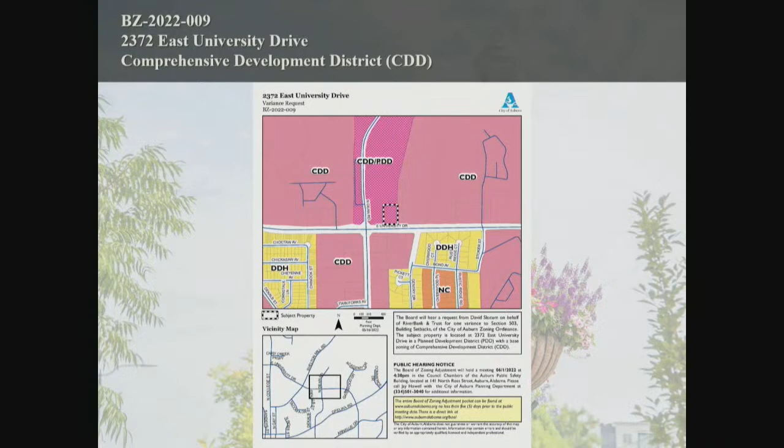Here's an aerial image showing the site pre-construction with a shared access driveway between the RiverBank & Trust and the subject property.

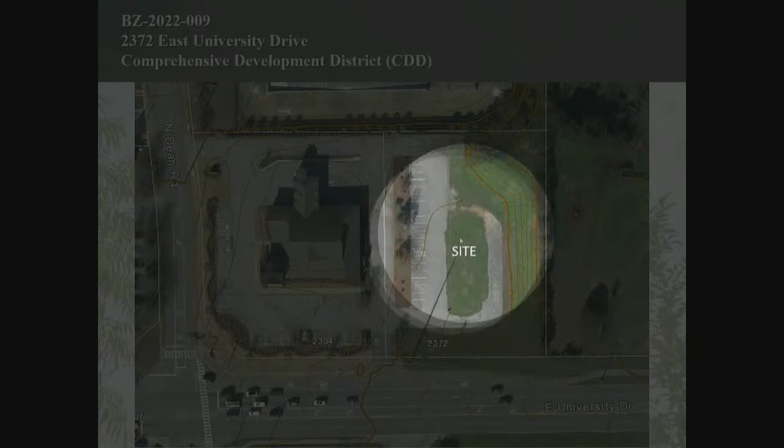The site plan for the project was reviewed by staff and originally represented a conforming setback. After several revisions, the building footprint was moved to the east slightly, and that resulted in the setback being non-conforming. Additionally, architectural plans had not been reviewed at the time, and that added 6 feet to the required setback.

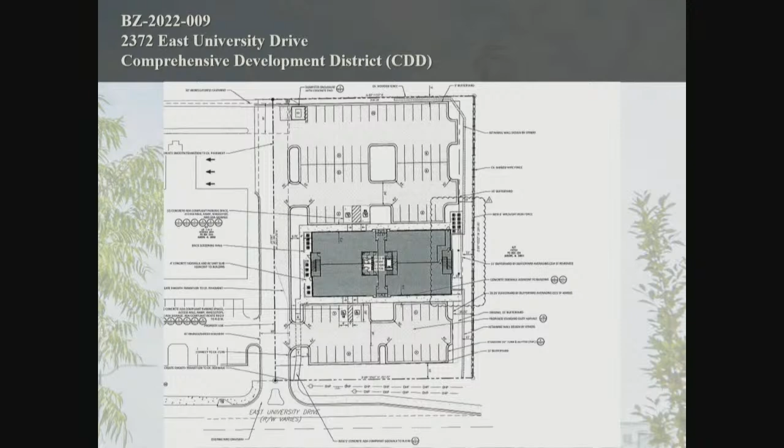Some permits to start initial site construction were issued while the final building permit was being reviewed, so there was some vertical construction. Staff reviewed the project for the final building permit, and that's when it was noticed that the setback was too close, with the patio area being approximately 12 feet from the property line and the overall building height being 21 feet to the property line.

So here's the current situation out at the site. The upper portion of the building is essentially framed in already. There's a large retaining wall that was required to accommodate the building footprint.

Here is a view from the neighboring property looking towards the building. And here's that aerial again, showing some of the topo challenges that the site faced, and why they had to build the retaining wall, which essentially dropped the building 13 feet below grade, to have the grade flush with the shared driveway.

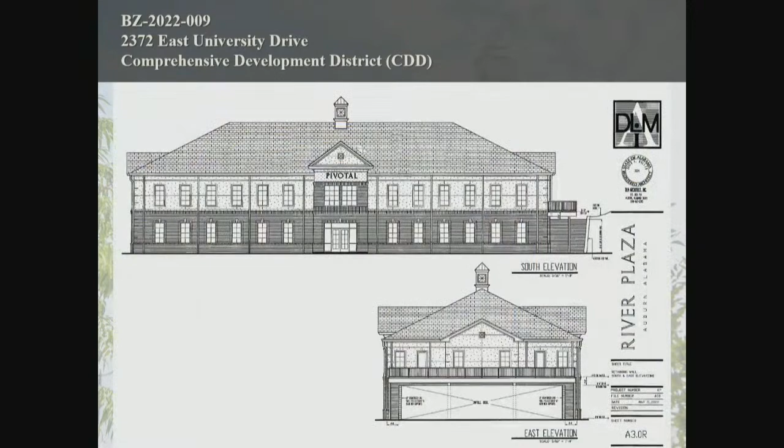So the grade difference between the two does meet the intent of the angle of light setback, in that the building dropped down 13 feet, so that angle of light is being maintained in a sense that it's not creating a nuisance, not creating a fire hazard issue. So if the variance were granted, there's no issue to the general welfare or to fire safety.

But there are no hardships associated with the request. They originally had a site plan that was conforming. There are things they could do to make the site conforming, although it may have some economic challenges to it. But economic difficulties are not grounds for granting a variance.

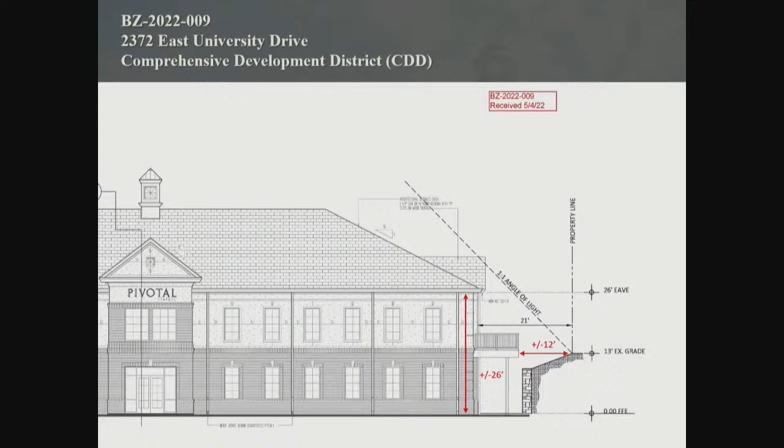We did receive a letter from the adjacent property owner that has no objections to the granting of the variance. Based on the criteria in A through G referenced in your staff report, because not all of the criteria were met, staff recommends denial. The applicant's representative is here, and I'm happy to answer any questions.

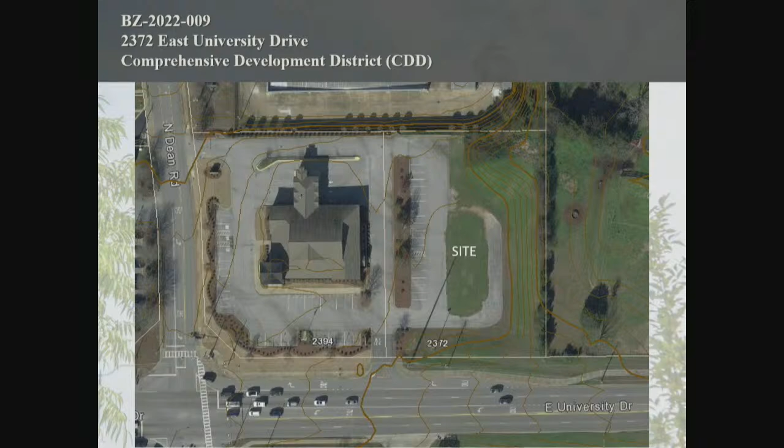Thank you. Yes, sir. If the applicant would like to come forward and speak, if you'll sign in right there to the left on your clipboard, on that clipboard.

Trying to figure this out here. If you press the top one, it'll zoom. Yeah, there you go. Okay, pressing on.

Good afternoon, David Slocum. I'm the civil engineer of record for this project.

I wanted to begin by giving you a brief overview of what this project is. This is an 18,600 square foot Class A office space building. I don't know if any of you have looked for office space in Auburn recently, but it's difficult to find Class A office space. I've looked myself.

We're really looking forward to this project coming online. It will have 16,000 square feet of leasable space, and 85% of that space is already leased to businesses such as commercial real estate, CPAs, financial advisors, things like that. So it'll be a professional office building.

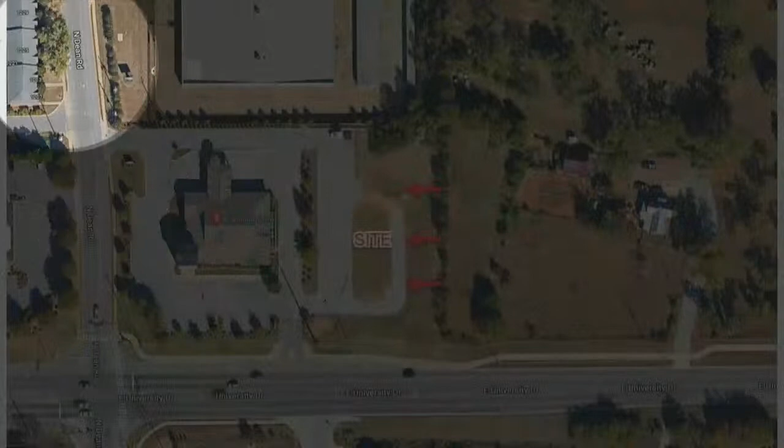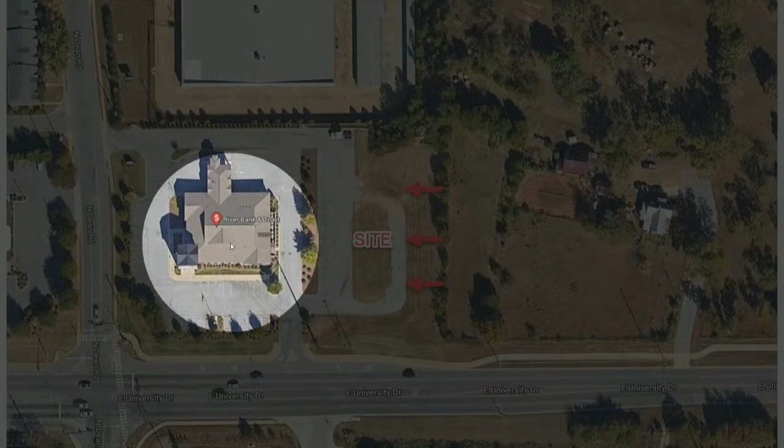As Logan showed you, this is the site. You can see North Dean here. This is Riverbank and Trust. And then this is where, when Riverbank was being constructed, this was the temporary bank location. I don't know if any of you remember, but there was a significant slope between this tree line and this asphalt here of about 13 feet.

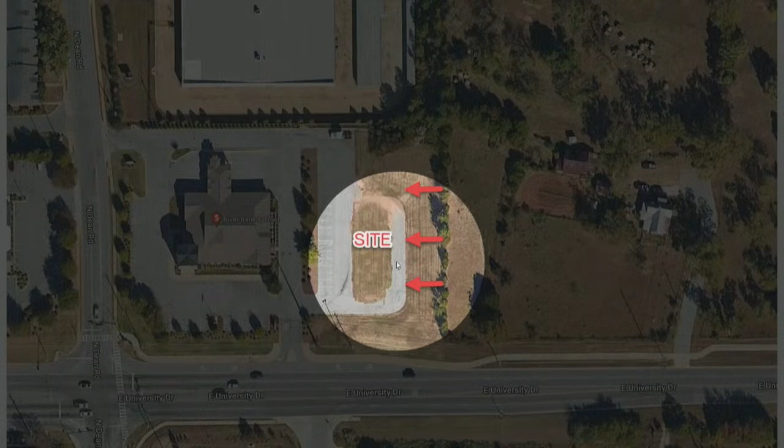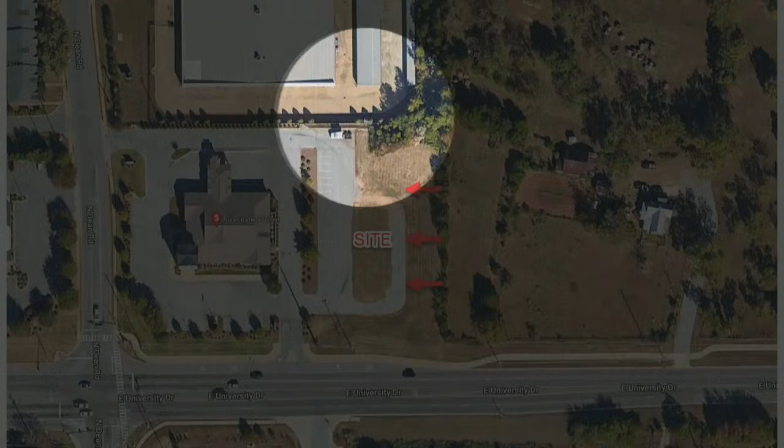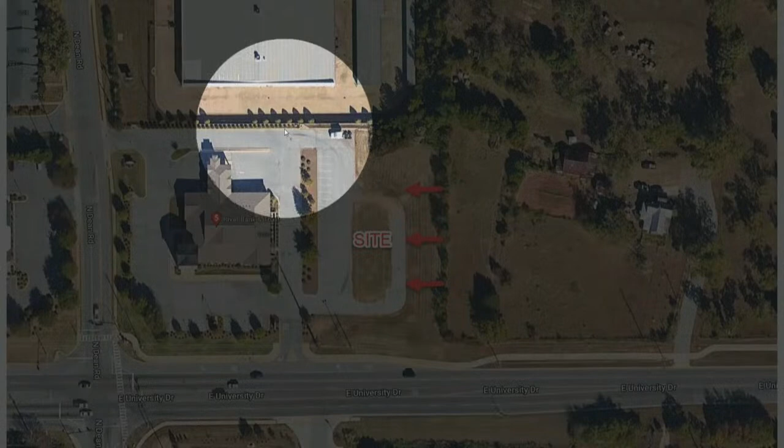If you'll also notice this very thick shadow here, that is a retaining wall between the River Bank site and the climate controlled storage units. I haven't been back there lately, but that's probably about 15 feet of fall between those two sites. So there's significant grade changes and topography challenges with this site.

This is the open field that you've probably ridden by and seen the big longhorn cattle out there. That's the property owner that wrote the letter saying that he has no objection.

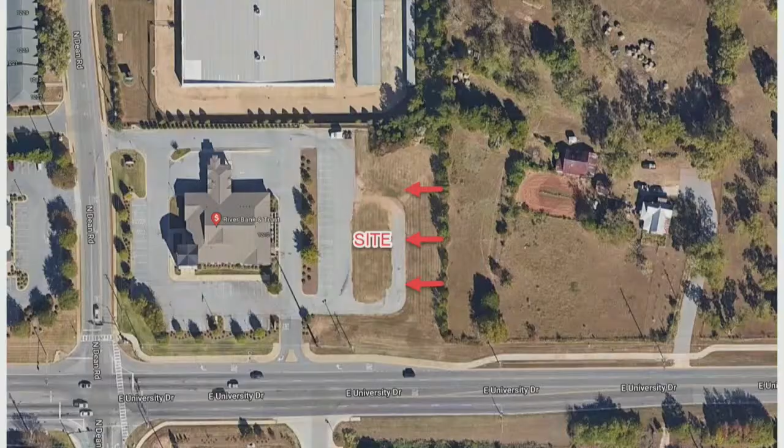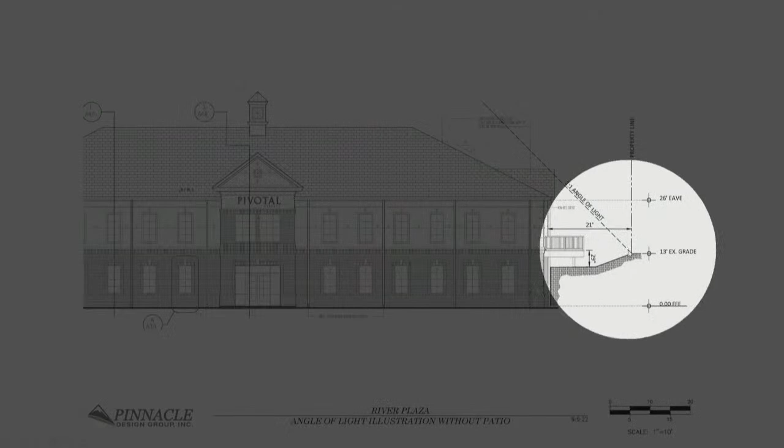As we've mentioned, this variance is all about the angle of light setback. I'm sure you're all very familiar with how that works. The eave height from the front of the building is 26 feet. If you look at the eave height from the property line in question, it's only 13 feet. So had the building been constructed the way it's shown here, there would be no variance needed.

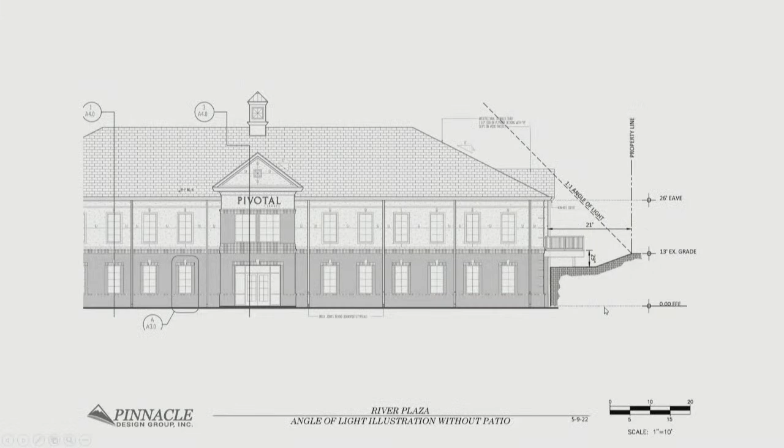However, we chose to excavate this small area here and build a retaining wall, which is shown here. The reason for that, there are several reasons, is to allow air conditioner units to be placed in that space so they're not visible from East University in the parking lot. I'll show you the floor plan in a moment.

There are two doors that provide emergency egress out of the building on that end. There are windows on that building that also serve not only as daylight for the tenants, but for emergency fire egress also. Not to mention the fact that building the retaining wall allows full use of the property rather than having a completely different layout.

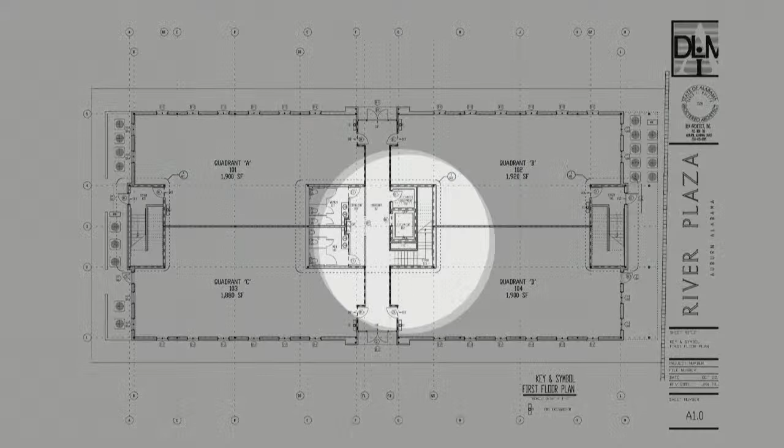So this is the floor plan. You can see the air conditioner units here. This is the retaining wall. This is the open space. You can see the exit there and windows along this side of the building.

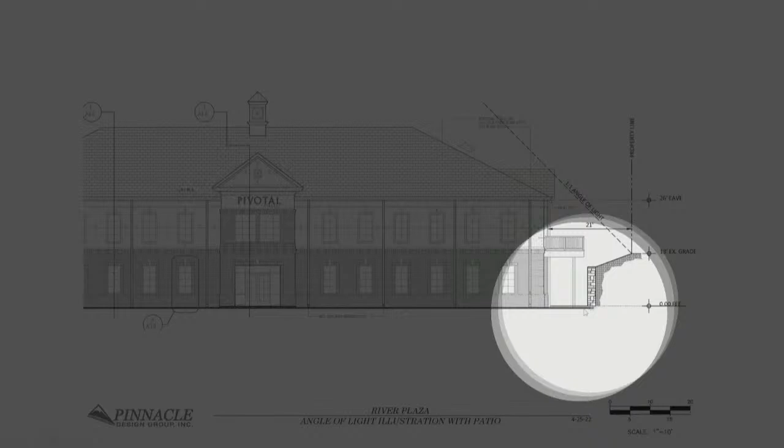So the entire reason for the variance is this one excavated area. I'm hoping that makes sense, because the planning department now has to measure the eave height from this point rather than this point.

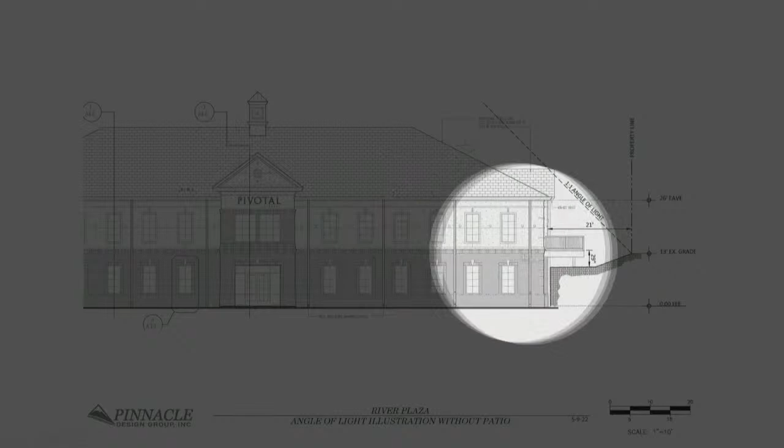So this is, I think, the same photo that Logan had showing the retaining wall. You can see the adjacent grade is pretty much level with that second floor. So if you view the building... did we lose that last photo?

From the adjacent property, it appears to be a one-story building because of that drastic grade change. So that's why we believe the intent of the zoning ordinance is still met. It all just boils down to a technicality of where you measure the angle of light. If you draw the one-to-one line from that point, it clears the eave height.

We believe the variance is necessary to allow full use of the property, to allow adequate emergency egress, to allow space for utilities to be concealed. The entire variance is caused by this unique property topography scenario. As mentioned, granting of the variance doesn't negatively affect the adjacent property owner or the general public. So we hope you'll consider making a positive vote. I appreciate your attention.

Is that staircase the emergency egress there, or is that just a patio you're hanging out on? Yes, it is emergency egress. That's what I thought, an exit. I just didn't see any stairs. I assume those are coming later. Second floor and first floor.

So the door on the first floor is an emergency egress, or the patio is an emergency egress as well? Can you put that slide up that shows where the cutaway was, where the wall is? Is this the one? The one from the side, or the actual picture, I think, is what we want to see. Either one, yeah. No, go back, the one that's in section. Scroll backwards. That right there. Or did you want to see a different one? No, that's good enough.

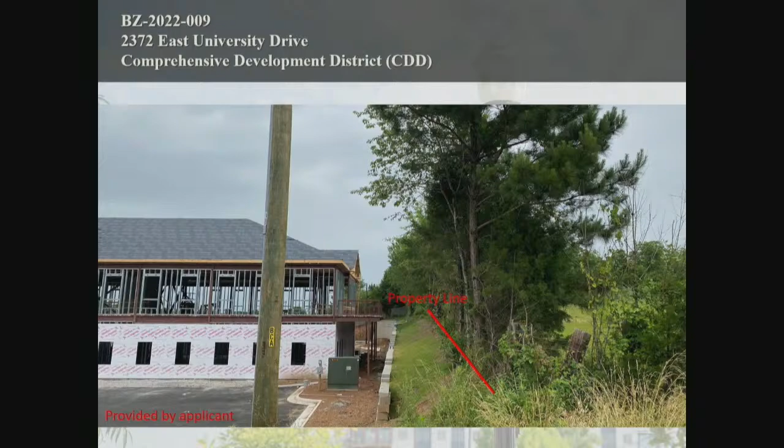So that deck, that second floor deck, is that access out of the building as well? Yes, but that wouldn't be considered emergency access because there's a dead end there. There's a staircase immediately to the left that would bring you down to the end of the building where you could exit and go either direction. So it's internal, and there's doors and windows below the deck for exit? Exactly, yes.

So is that emergency exit required to meet the code for emergency exits? Yes, it's my understanding, I'm not an architect, but yes, that is required. So was it approved before you made this change though? The building plans were not reviewed until we got to this point. Is that what you're asking? Yeah, and when they were reviewed, that's when this issue became apparent. And you mean reviewed by the city? Exactly, yes.

And if you dug down, just to understand the angle of light, if you dug down another floor and didn't build a retaining wall, then you'd have to be 10 feet further away? The height measurement's taken at the base of the building, basically the grade. So you measure the height from the grade at the building to the eave, and that dictates the setback. So the fact that they put that retaining wall in there and lowered it made this become a variance issue? Yeah, if that was sort of a basement on that end of the building and the grade was like the other drawing he showed, up below that deck that extends out, then it would be measured from that point and it would comply.

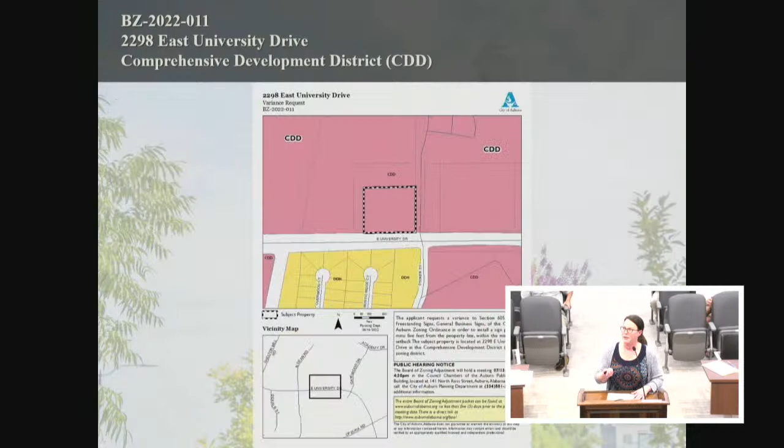This is a request for a variance to Article 6, signs, of the zoning ordinance. The applicant is asking for a variance to allow a sign to encroach into the 10-foot setback at the front property line. Here's the proximity map. The property is zoned CDD with some DDH across the street, Stoker Heights I believe, and the East Alabama medical facilities across the street as well.

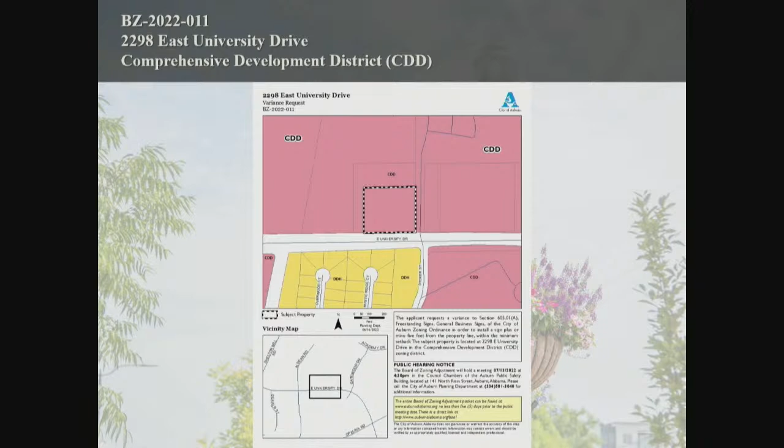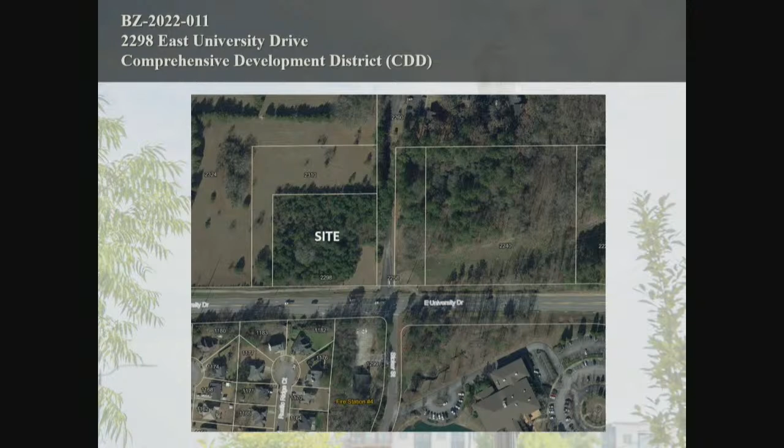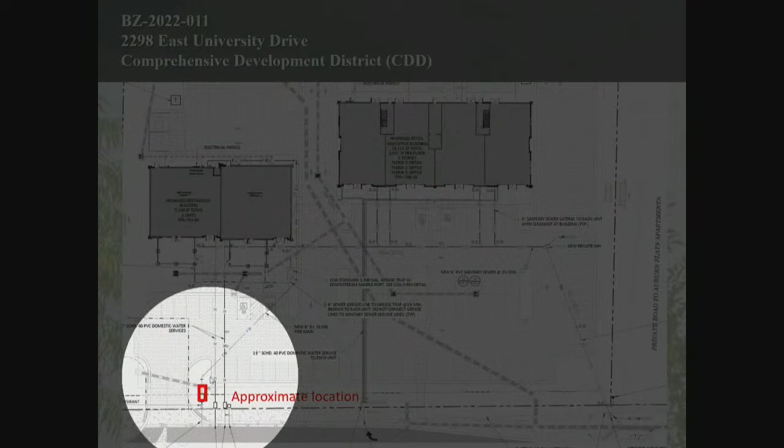Here is an aerial of the site. The building is under construction now, two buildings under construction, one 2-story and one 3-story. They are building a restaurant, retail, and office space development. The applicant is wishing to place the sign 5 feet from the property line, when 10 feet is required. The sign would be 120 square feet with spaces for individual tenants to have their signage.

After staff's review of the variance request against the criteria for granting a variance, we found that the request does not meet the criteria, and we recommend denial. The applicant is present.

Amber, I saw that you noted there might actually be a visibility issue on this one, right? There was a letter from the neighbor, Shirley Patton, on number F. Staff is concerned that the proposed sign location may create a site visibility obstruction for motorists, and the neighbor said the same thing as well. Yeah, that's what you're thinking, Morgan. Good find. I starred that one.

Anyone have any more questions for staff? Thank you. Is the applicant here? If they'd like to come and sign in and speak, please.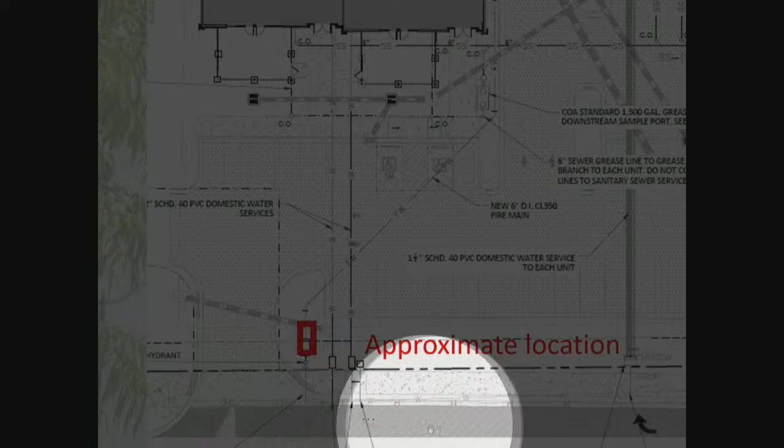Can you zoom in on that area? Okay, I don't know if you can see it or not, but it's barely visible. You see that darker gray stripe, and there's the stop sign. That is the stop bar where a car would stop to pull out onto East University. The sign is way back behind that point. I can tell you right now, it would be very easy to show that that does not obstruct a view. So I'm not sure why that comment was made. If you're looking this way and this way, that sign is nowhere close to obstructing your view.

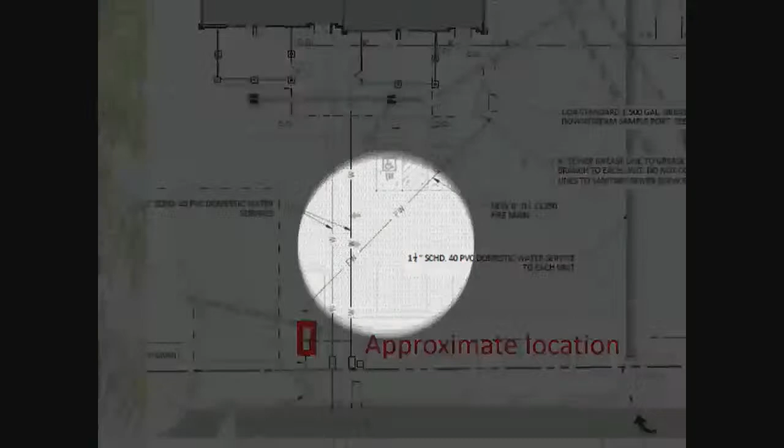So the issue here, what's the dimension from that gray stripe to that sign? I don't know if that's 5 feet. 25, maybe more than that. So the sign proposed there is 5 feet from the property line, and you're saying that's 20 feet of right of way before you get to where you stop? Are you asking for a straight line distance this way? Sure, I'm just going off the fact that I know this is 24 feet, so I think 25 would be accurate.

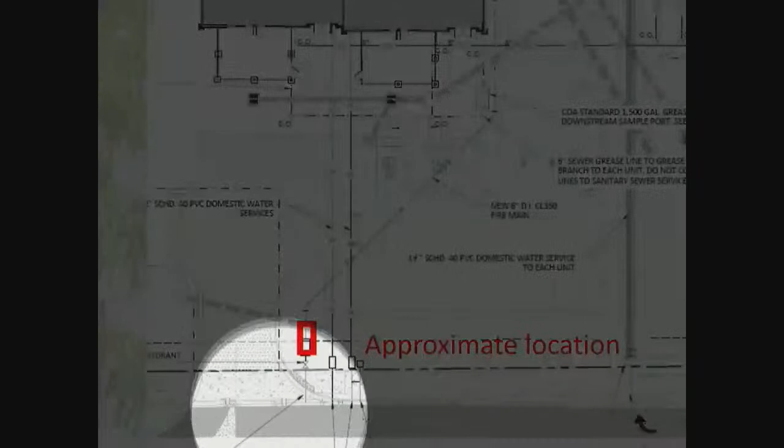So when a car exits out of there, can you put your pointer on where the car stops, because it looks like it can go left or right. This is a right out only, so whereabouts would a car stop? Right there, there's the stop sign, there's the stop bar. So when a car is coming out and a car is coming in, does that sign get in the way? If you back up a little bit, straight across from the red box, that little rectangle where your hand is, from left to right, is that kind of a blind spot area if someone's coming in and coming out? Or if that sign got moved back just a little bit more, would it be better, like instead of 5 feet away, 6 feet away?

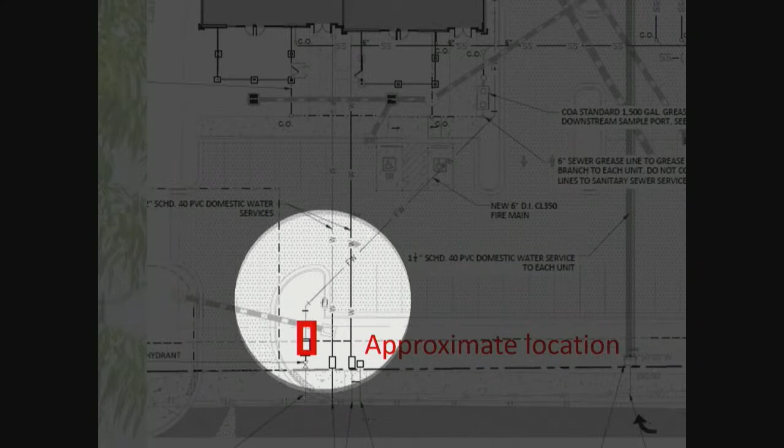I'm not seeing where it would cause an issue with traffic, that's just my opinion as a civil engineer. So the things that aren't shown on this drawing: there's a water vault, and this drawing is a bit outdated. I'm not sure why it was used, I didn't put this application together. But there's a water vault in that island, so the sign cannot be moved back, it would conflict with the vault. There are 2 water meters here, and a storm pipe here, as you can see. So it's pretty tight on where to locate the sign.

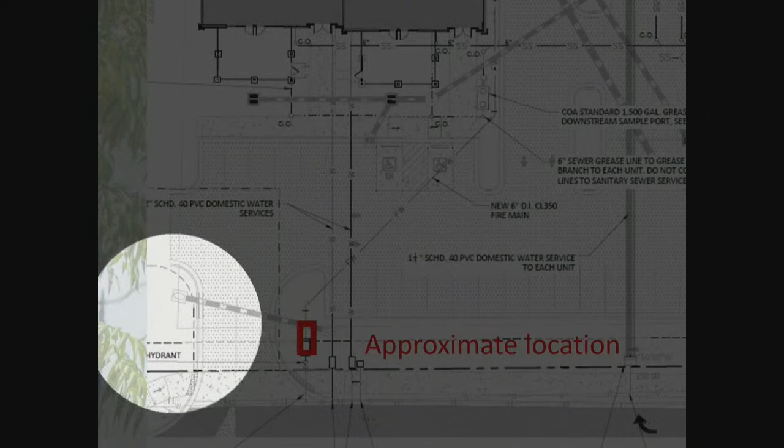On this side, you've got a significant grade change from the sidewalk down to a natural drainage feature that is draining through, probably dropping 8 to 10 feet right there. So if it was moved back out of the easement, it would pretty much not be visible, it would be so low. And then anywhere along the frontage, you can see that the sign would encroach into that same easement.

Somebody did a poor design with this. Was that, to have that water vault there and not have a spot to put the sign? Or was the sign addition an afterthought during construction? I assume it was something that was talked about beforehand, I don't think the sign was an afterthought, was it?

The water vault is the main issue being right there. I'm not sure why it got located there. It wasn't on the original plans. I think it was a little change during construction.

I look for oddities in the code, reasons to either approve or deny a variance. What I don't like is when something's brought to us and it's nothing the code did. It's very black and white: you need to be 10 feet from the property line. Someone threw a design together and said we're going to put it 5 feet, and then go to this board and ask for relief.

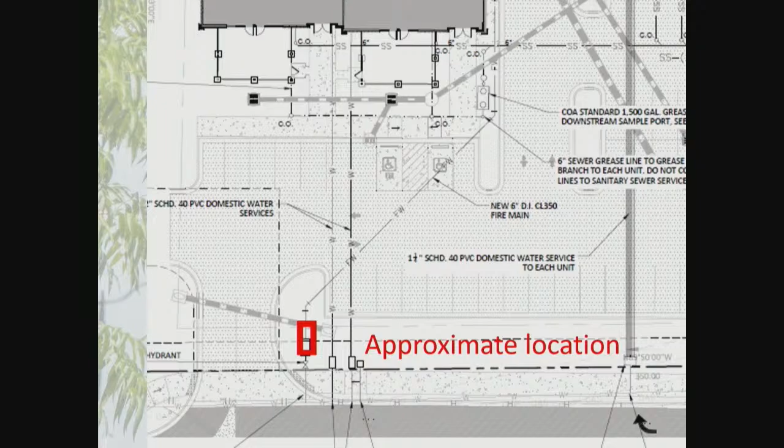From what you just said, you have nowhere else to put this sign, and you're putting that burden on us when whoever designed this should have said, let's find a spot, let's put it there. The water vault doesn't need to be there, it needs to be moved somewhere else. I don't do that for a living, I'm not sure where else it could go. But now y'all are here requesting this, and we can't see where the cars go.

I do know that the closer to the road signs are, the more they inhibit visibility, and I know that's also a busy road. Being 5 feet closer to the road probably doesn't help you see those signs a whole lot more. I don't know if people even look at signs a whole lot anymore, but that's my thought on it.

Just a second, sir. Does anybody else have any questions for the applicant?

Could you eat up a parking space and just shift it over and back? Possibly. That parking lot is quite a bit lower than East University, so I don't know if it would even do any good being that low.

Do you have any pictures of it zoomed out further than what we have here? No, just that one. Mr. Chairman, in your packet there is a plan that shows the entire frontage. I don't know if it's in the slide packet or not. I see, yeah, it's zoomed in, okay.

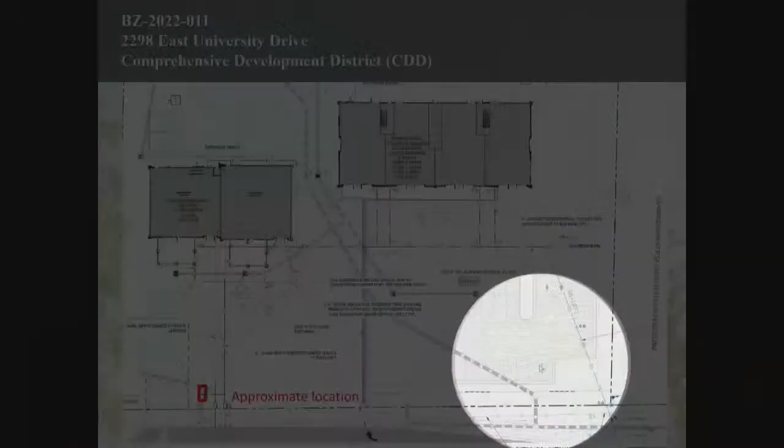So does the Alabama Power easement take up that whole area where you couldn't put it there? Yeah, you can see it right there. There's the power line, and the easement is right there. But it could go, I mean, I can't tell that much from the drawing, but it could go there with power company approval, we would have to see if they would approve that.

I'm just not sure if the owner would even build a sign that far away from that. You can hear from him if he's allowed to come up. All right, any more questions for the applicant? Thank you. All right, we'll open the public hearing if anyone would like to speak in favor or against this request.

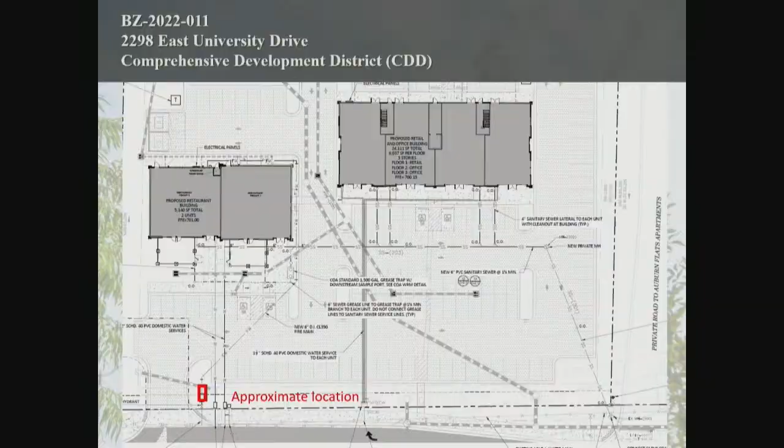Hello again. A couple of things about the water vault. The original plans were approved by the city with a certain size vault. After the approval of the plans and everything else, we were told that there was not adequate space in there for the meters they wanted. We had to enlarge that vault. So that's one of the issues.

The other issue is that down there on that corner you're talking about, I know y'all can't see the grade, but it's probably 6 or 8 feet below the level of the parking lot. So to put a sign there and meet the city code for sign height and square footage, you would hardly see it coming from that direction.

Which is lower - the parking lot or this bottom right-hand corner, which is the lowest part of the property? That would be more visible to cars. The parking lot is up here, so you'd have a sign down here coming from this way, where the drive goes and there's a bank that goes up.

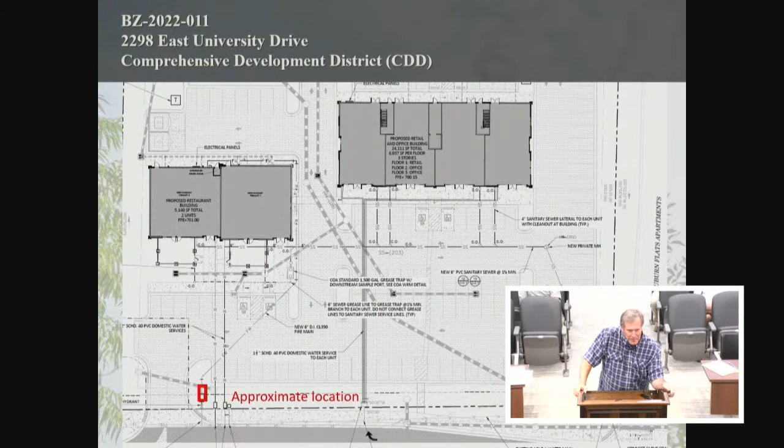Yes, I'm recalling that now. So it would be stuck down in a hole basically coming from that direction. But by hole, you mean it would be at grade with the road, basically? It would be at grade with the road.

The other issue is that gray area where the cars stop that David was talking about is actually just a turn lane, not oncoming traffic. The oncoming traffic is actually another lane this way. So the factor of that red rectangle being any kind of line of sight issue - I don't see how it could be, unless you're looking back at the building.

My main point was we had to change that vault after it had been approved the first time, when Water Resources came back and looked at it and made us put in a larger vault. I'm not sure that's the exact reason, but I do remember that issue, and it made us put in a much larger vault there. Thank you.

What is a water vault? I want to make sure I understand. I'm sorry, one other thing - we had heard that the Water Resources Board had an issue with it, but I've actually got an email from Chris Berry to the Planning Commission saying they had no issue with this sign in terms of the water vault.